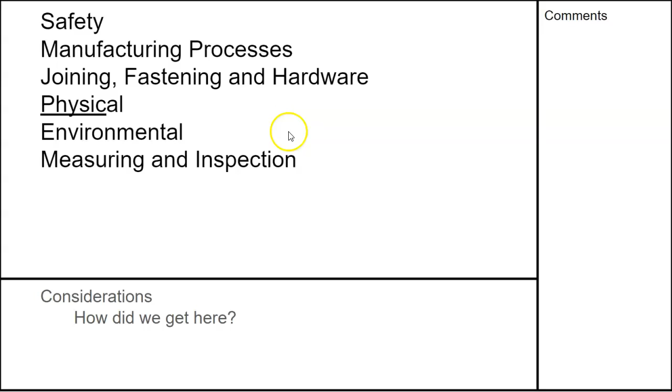All right, we need to revisit the scope of work. So we'll talk a little bit about safety, the manufacturing processes, joining, fastening hardware, physical, environmental. When we think about safety, we talked a little bit about pinch points, the rotating mass, RPM and torque, vibration. Is that gonna affect the sound level?

Actuation, linear movement, force and frequency. Mass, is it really small, really large? Does it have the potential to tip? Are we dealing with elevated temperatures, super low temperatures? To that end, is pressure, is vacuum an issue? Shear and sharpness is where the material as it's moving, does it have a cutting action?

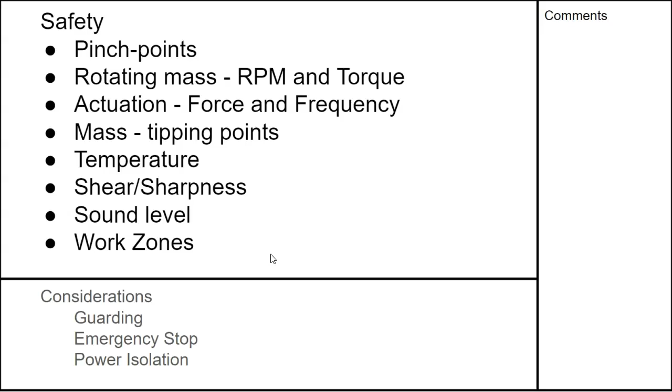So I'd mentioned the sound level. We're going to have to wear hearing protection, and then is this going to have a safe work zone where we need guarding, emergency stop, power isolation? We get to environmental things like the wet areas.

So in our manufacturing processes, some of the common items that we'll go through, whether they're in-house. It's going to be important to know what you have access to, if you have access to any of these within your organization, or if everything's sent out to a vendor to provide these services. So the considerations are the material. Harder materials require specialty tooling. That's why a lot of this, if we can get away with aluminum or plastic, is going to be more desirable, cost-effective to our process.

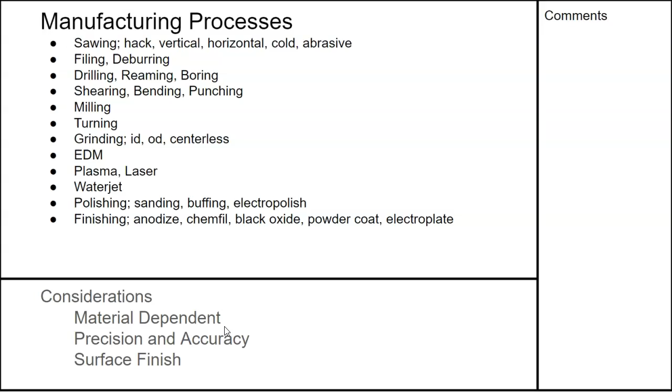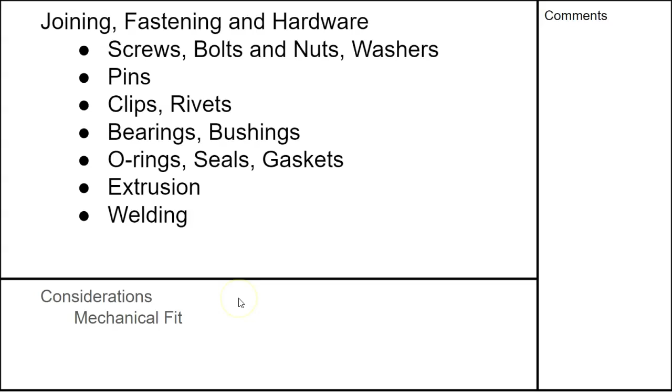And then what levels of precision and accuracy? What kind of surface finishes do we need? In the joining, we have the screws, bolts, and nuts, washers, the pins. We just talked a little bit about the bearings and bushings, clips and rivets to retain, O-rings, seals, gaskets, aluminum type extrusions, and then welding. So all of our mechanical fitments.

The threads. I think we saw this when we did the thread, but this is a quick review. The machine threads run like quadruple aught, but I don't like to think about those. They're really small. The machine threads 0 through number 12. This will give you the calculation for the major diameter, the pitch, and the minor diameter. So the important one here is the first number in our series, 10-32, 4-40, 6-32. Knowing which ones are most commonly used. But the important formula is the number in front times 13 plus 60 will quickly give you the major diameter.

The fractional is the first part, and that could either be read as 0.250-20 or quarter 20 in our naming, and then we again have the pitch and calculate the minor diameter. The metric, I've done it quite a bit, and I always manage to get myself in trouble doing the math in my head, but the 39.37 inches in a meter divide by 1,000, 0.03937 is 1 millimeter. That is really close to 40 thousandths of an inch. Makes the math easy. As I mentioned before, if we were to take this M6 times 0.04, that would give me 240 thousandths. And the actual is about 236. So very close, very quick translation.

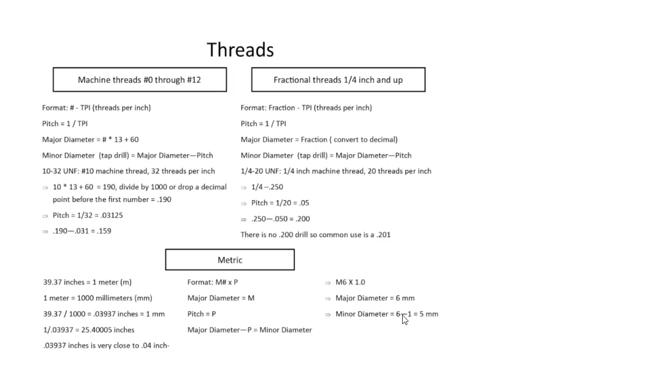And then metric being the oh so complicated, dripping with sarcasm, we take the first number and subtract the second number, and that gives us our major and our minor diameters. So an M6 by 1, major diameter is 6, 6 minus 1 is 5. Right, so you can have access to all that information to be able to check your designs as you're going through it.

On our physical considerations, the static and dynamic forces that we're dealing with, pressures, torque, vibration, acceleration, thermal, electrical, and fluid. And this is where we get into that simulation or finite element analysis, being able to do basic prove or disprove that, really, I mentioned gross errors. We're looking for gross errors. There's always going to be unintended, unanticipated consequences of any mechanical system.

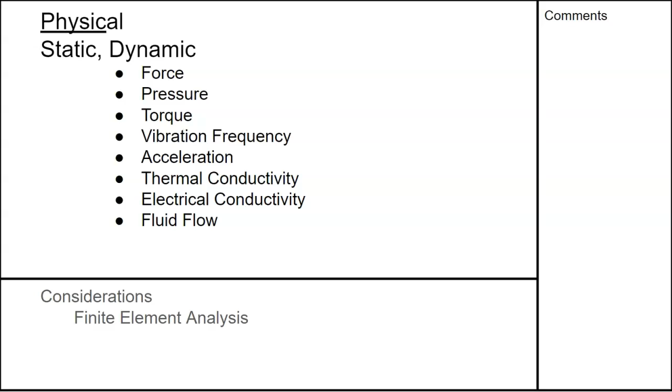It's how much you have looked into your magic crystal ball of design intent and said, at the end of the day, this is going to be an acceptable level, and we can make those changes and updates as we go.

In the environmental systems, we're concerned about corrosion, outgassing, lubrication. We talked a little bit about the bushings, permanent lubrication in the roller bearings or in the bushings. Thermal cycles, hot and cold. Is this going to be exposed? Is it going to be in a temperature stable environment? Is it going to produce thermal hot and cold in its operation?

Are there any toxicities in the process or in the materials that we're using, and reactivity to other chemicals or gases that are in the area? So there are certainly things that we would not want to use aluminum, that we go to stainless steel because of the types of interactions that we can reasonably anticipate.

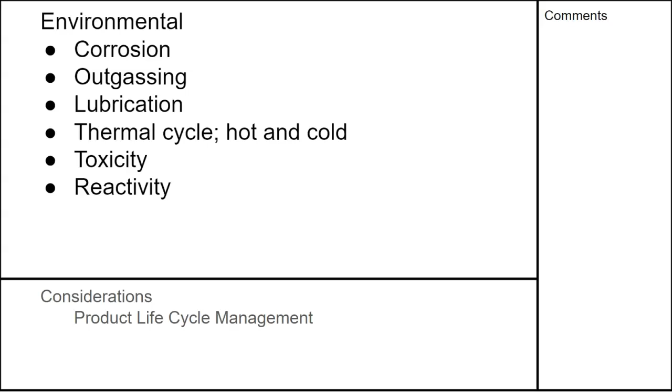So all this comes down to product life cycle management. And the other side of the life cycle management is once the assembly, the product has gone through to its end of life, how do we recycle it, repurpose it, basically so that it is not just sent to the landfill.

And then our measuring standards, we've talked a little bit about ISO and ANSI are the organizations, and ANSI refers to ASME, SME, and SAE, automotive, manufacturing, and mechanical. For those, the recommendations for those, and they are the authorizing organization that gathers up all that information and says, as a group, this is what we're going to do.

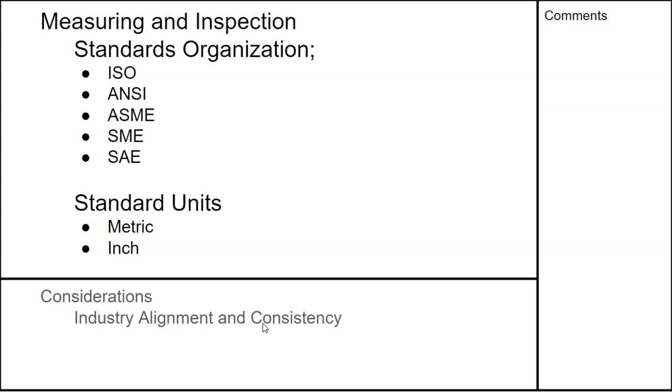And then, of course, our standard units of metric and inch, and we're looking for industry alignment and consistency in our process. When we get to measuring and inspection, we're putting all of these tolerances on. If it can be measured with a scale, a tape measure, ruler, then you have pretty open tolerances. So calipers go a little bit further, and micrometers even go a little bit further. And when we get down to the coordinate measuring machines, that is a semi-automated process that's going to be able to inspect our parts.

Protractors and sine bars for angles, gauge pins for holes. When we get to those really fine 10 millimeter holes, I'm going to go to my gauge pins and measure the set of pins in thousandth of an inch increments and be able to reasonably verify the diameters that were drilled, reamed, or otherwise in their manufacturing process.

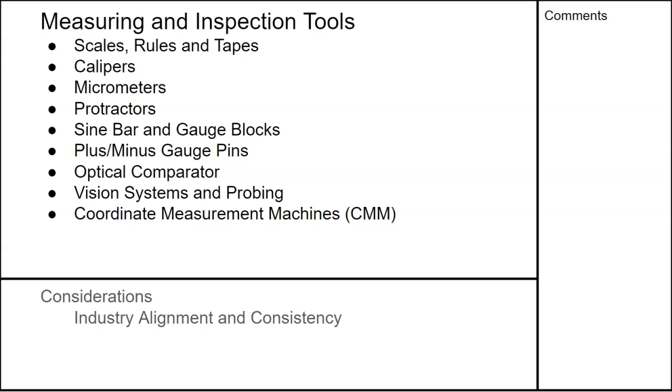Optical comparator uses slides and overlays, shines light through it, and can be a very quick, easy way to verify angles and geometries. And there's a certain amount of magnification that comes with that, so you can look at the detail of the part. And then vision systems, moving more to a computer type system.

And then we get into the documentation, which is what we've been working on. And we haven't really looked at the DimXpert or tolerance analysis, but we will get into that also with the model-based definition. With our drawing modules and the output, then we're really looking at what are the working documents, the hard copy, paperless. Are we looking at it in a viewer, PDF, eDrawings, some other program to be able to view without having to have a copy of SolidWorks on every machine.

And so scope of work, and then the quotes and estimate, and our working drawings become our documents. So all of this ties in, and we're looking pretty much at the scope of work. We really want to start and end with the scope of work, because that's going to drive a lot of these decisions. The quote and the estimate are going to be based on this contractual agreement that is generated by the scope of work, and the working drawings are the end result that says this is what we're going to manufacture, this is what we've charged you for, and this is our end product.